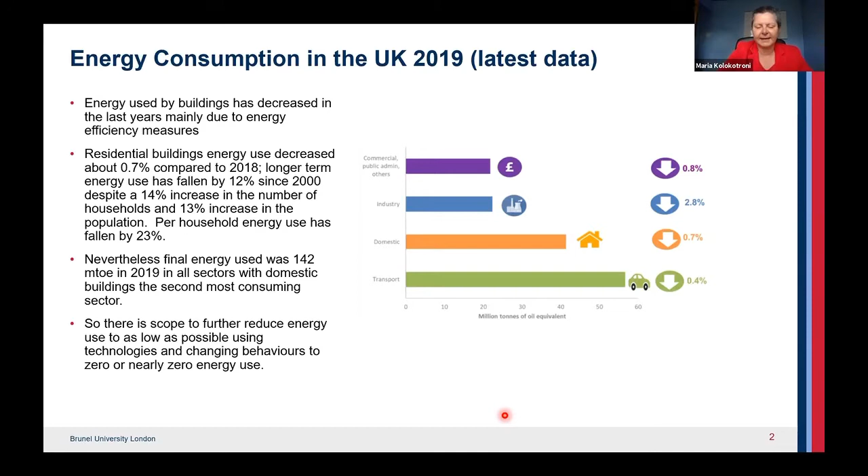Despite this reduction, final energy use was 142 million tons of oil equivalent in 2019 across all sectors, with the domestic sector being the second most consuming, as I mentioned. So there is scope to further reduce energy use as low as possible, using technologies and also changing behaviors of users so that we can achieve zero or nearly zero energy use.

First, I thought of putting some definitions here. What is a net zero energy building? What is nearly zero energy? And what is a zero carbon building as well?

First, energy is used by a building and its systems to provide safe, healthy, and comfortable conditions for its users. Carbon is the amount of carbon dioxide, or equivalent, emitted by the energy uses in the building, and the amount of carbon depends on the fuel used for the production of this delivered energy.

A zero energy building is a building that does not use energy from the grid. A nearly zero energy building uses only a small portion of the energy that other similar buildings use. A zero carbon building is a building that does not emit carbon dioxide equivalent emissions because of the energy it uses. Zero carbon is not equal to zero energy, because carbon depends on the fuel used.

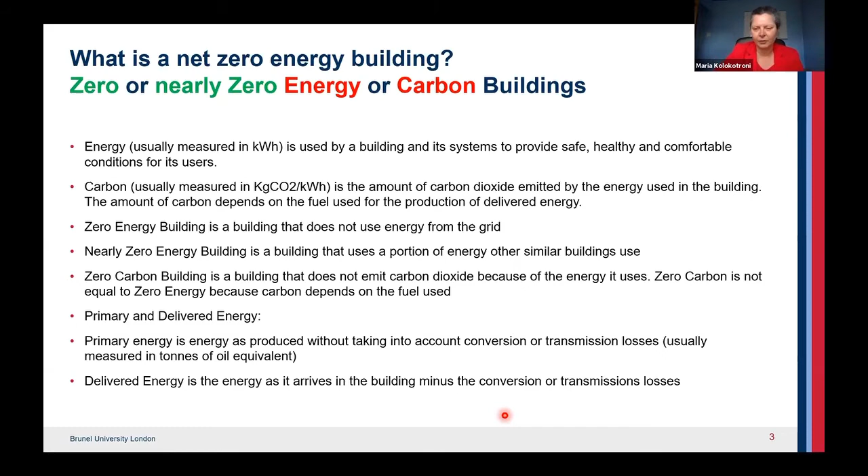Finally, we sometimes use the terms primary and delivered energy. Primary energy is the energy as produced, without taking into account conversion or transmission losses, usually measured in tons of oil equivalent. Delivered energy is the energy as it arrives in the building, minus the conversion or transmission losses, and this is the energy we are usually billed for because we have used it in our building.

So I talked about the definitions of what a low energy building is. But why we provide this energy is in order to have a safe, healthy, and comfortable environment. The four areas we try to provide this comfort in are visual comfort, as we perceive it with our eyes.

Acoustical comfort as we perceive it with our ears, thermal comfort as we perceive it with our skin, and air quality as we perceive it with our nose, but also the effects it will have on health. So there are two aspects here.

All these conditions are provided by the building envelope and how we design it, the installations for heating, cooling, air conditioning, and also lighting and so on. Users are quite important in this aspect because they moderate how the energy is used according to their needs and according to how they want to use it.

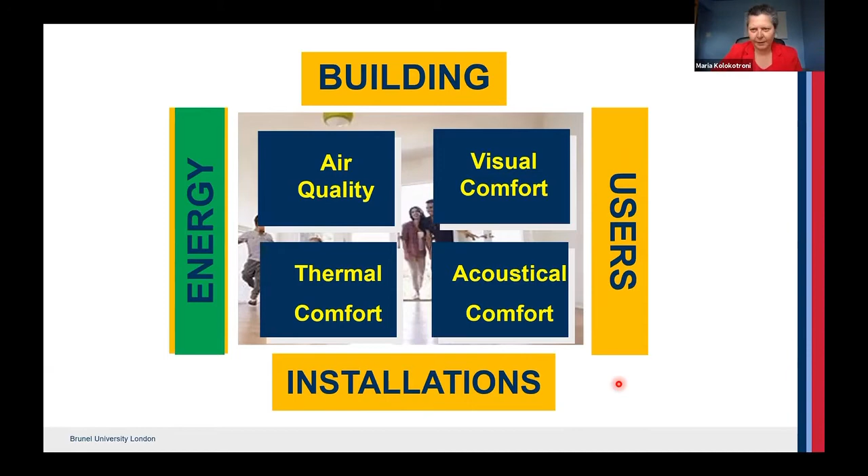First, reduction of energy use that is needed by using passive methods for heating and cooling, such as ventilation, and for lighting, such as day lighting. Then energy efficiency measures, energy efficient appliances and lighting, low energy systems for heating and cooling. And finally, renewable energy integrated into the building to cover the residual energy which is needed.

Of course, these are the principles, but how we reduce the energy and how we provide this energy efficiency is the big question. And we have seen in the press quite a lot of debate lately. I put this headline here from BBC News about banning all gas boilers from 2025 to reach net zero. So there is quite a movement to change the fuels that we use to heat our residential buildings, our houses.

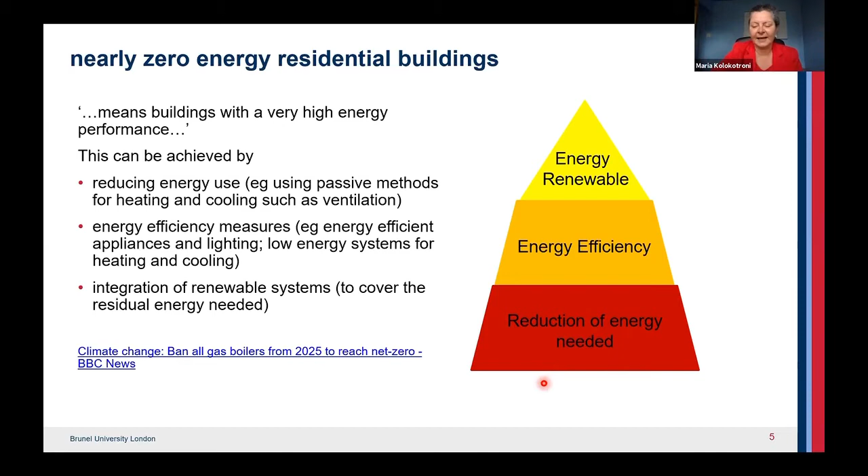The building regulations in the UK encourage net zero buildings, but because they require calculations of the CO2 emissions from the dwelling, that they should be less than a target that is specified. Also, they encourage the fabric energy efficiency of our buildings, so insulation and measures like that are important. And then passive control methods, and also how we operate as users, as occupants, efficiently in our houses.

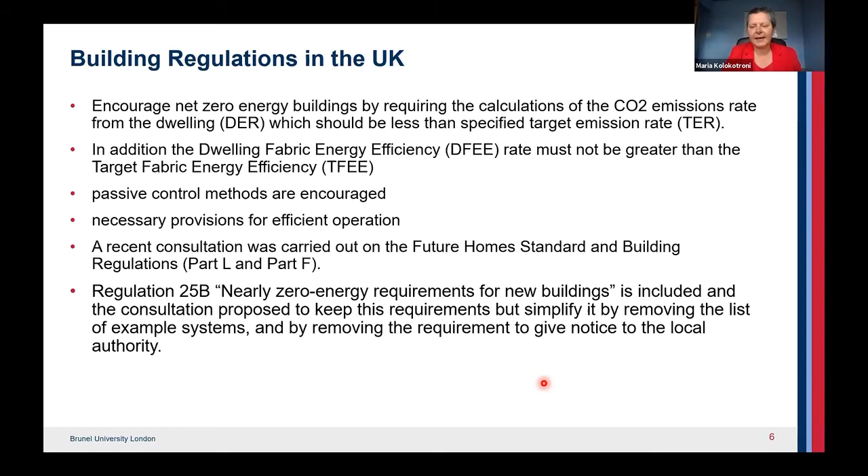There was a recent consultation on the Future Homes Standard and in the building regulations. And there was a regulation 25B about nearly zero requirements for new buildings. And the consultation has proposed to keep this requirement, but simplify it by removing example systems that were there, so it makes it more flexible, and also by removing the requirement to give notice to the local authority, which again adds to the flexibility.

And the next question is, why retrofit to nearly or net zero energy? We all know that the existing building stock is not very energy efficient, and it is also responsible for quite a lot of the total energy use and carbon emissions. And this building stock will be standing for the next 30 years.

So there is an opportunity for energy renovation interventions that will cause positive impacts at all levels. And apart from improving energy efficiency and reducing carbon emissions, we also tackle energy poverty, mobilize the construction sector, and contribute to a cleaner, healthy, and sustainable environment.

However, the energy efficient renovation of residential buildings especially has very low rates at present. So there are initiatives and policies that are proposed there to encourage these interventions. But the tools and technology specifically for existing residential buildings are needed to achieve this, and these are not fully developed yet.

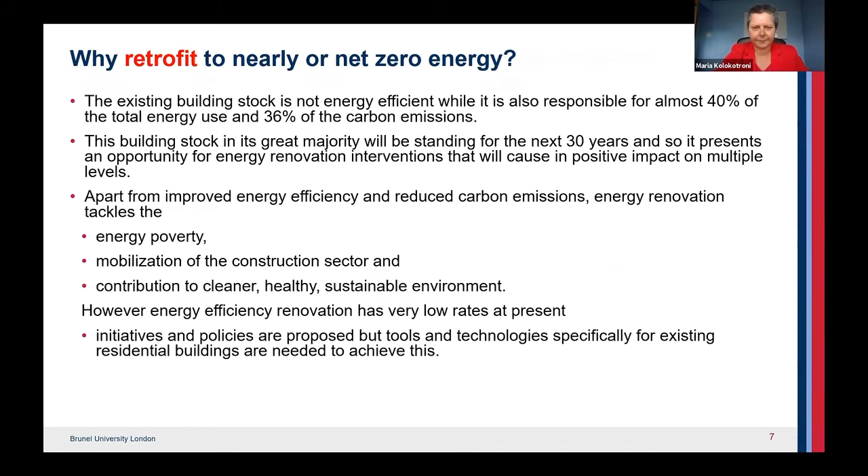So in retrofitting residential buildings, should energy efficiency, decarbonisation, and integration of renewables be the only consideration, which is what I mentioned before? And the simple answer is no, as they need to be considered together with affordability, so costs are very important, life cycle thinking and circularity, and how we use the systems and materials we use, how energy efficient they are in their total life cycle, also high health and environmental standards, and addressing the digital transition as well.

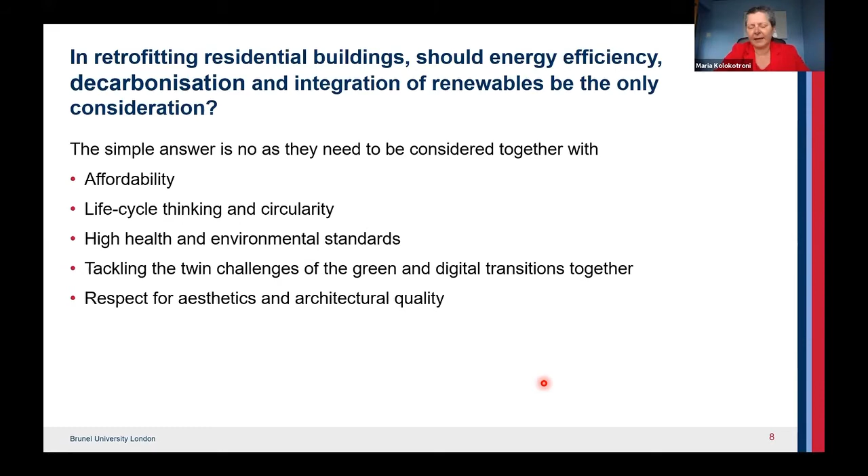How we use this in our buildings. And finally, respect for aesthetics and architectural quality, because if a building is not accepted by its users and society, then it is not going to be duplicated, it's not going to be repeated.

So I will talk about a project that we started about 4 years ago, and it is near to completion now, which is about residential retrofit to create an assessment platform and demonstration for near zero energy and CO2 emissions with optimum cost, health, comfort, and environmental quality.

And in general, for this project, we need to plan it in the right way. We need to carry out the interventions in the right way so that we can get it right in the end. And this project is a European project, and it involves a large number of partners across Europe.

The project has got this three-step approach.

First, the refurbishment assessment through a tool we are developing, which provides a holistic overview including cost, energy, users' requirements, and life cycle assessment of the renovation potential for different user-driven scenarios. Then the planning considers costs and how the intervention will be carried out—do people need to move out, or can they stay in? We look at how buildings can remain operational during refurbishment, selecting an optimal action plan and optimizing the installation process. Then comes the renovation, installing the personalized technologies determined through this tool.

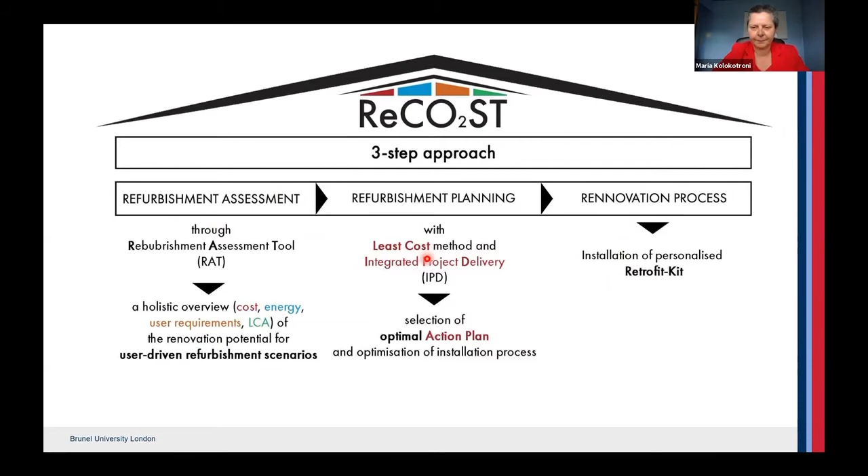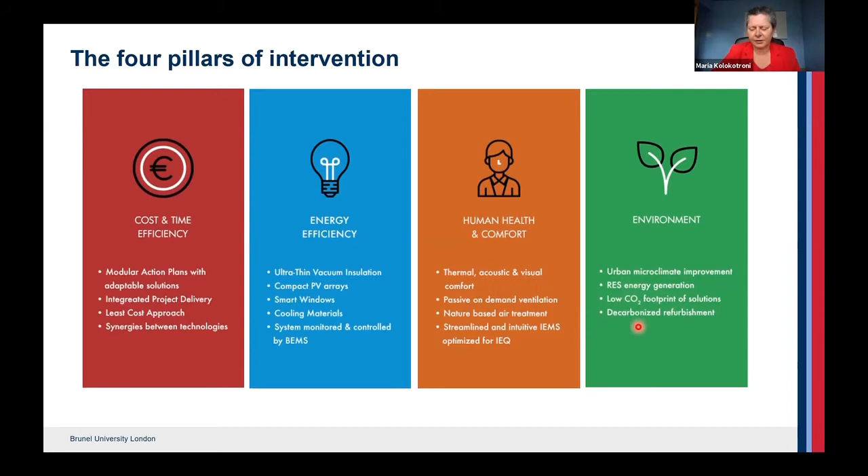The four pillars of the interventions are: energy efficiency with different technologies; cost and time efficiency using integrated project delivery and looking at synergies between technology; human health and comfort, including ventilation and air treatment, which has become quite important especially in the last year or so; and the environment—looking at the urban microclimate around buildings, how this can be improved to reduce energy and increase comfort, renewables, and in general the decarbonization of the whole process.

The ReCO2ST web platform is a fast, user-friendly energy retrofit analysis tool. We rank a large set of alternative scenarios, encouraging the designer and user of the building to take part from the beginning in defining the selection criteria. The objective is to identify the renovation scenario that allows the most balanced outcome of energy saving, CO2 emission reduction, and cost optimization. The selection is based on data on the current condition of the building, and a number of different scenarios are examined, including conventional and innovative retrofitting technologies, allowing us to prioritize which interventions are most attractive according to the selected criteria.

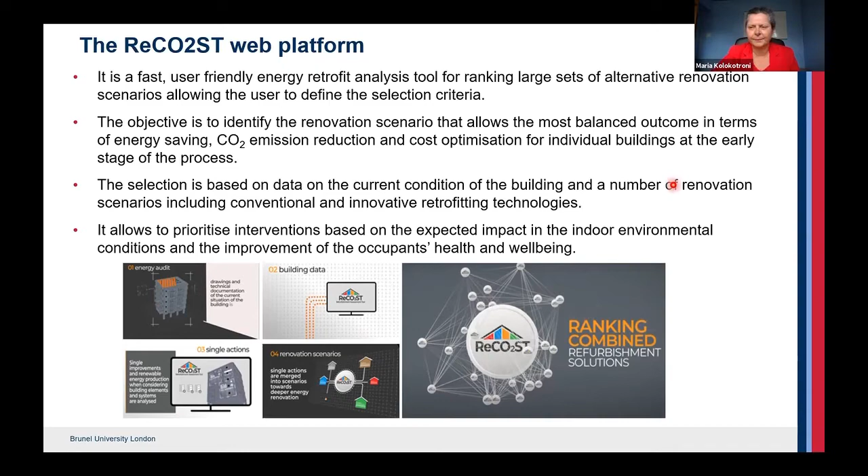So it's a web platform that includes tools that have been developed—pre-existing but developed further by the project. It can also include other tools developed by others. It consists of a structured sequence of actions: first, site visits and energy audits in the buildings to evaluate current status and energy consumption. Then building data is inserted into the platform to quantify the estimated energy and emission saving potential of different technologies, also considering the characteristics of the specific building and the climate. Then various renovation scenarios are investigated.

These scenarios are ranked according to four criteria: impact on energy consumption, which is what we're interested in some cases; cost, which will help faster market penetration; life cycle cost; and improvement of indoor conditions, because there's no point saving energy if people don't have comfort in their houses.

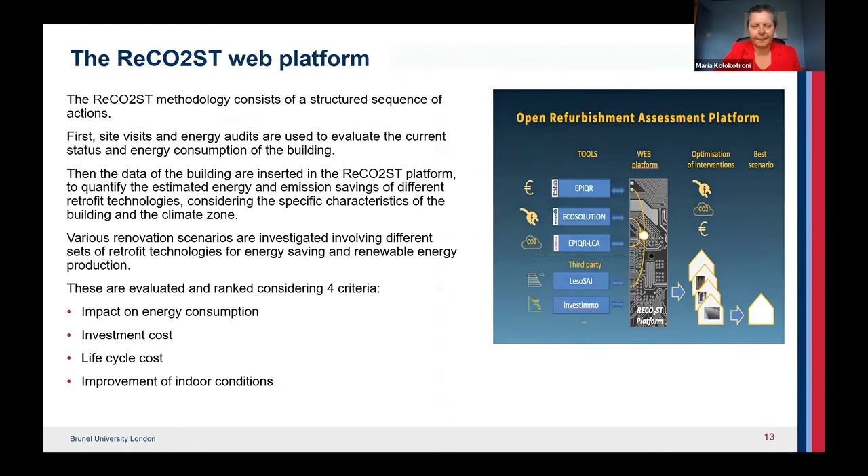Here's an example of one of the tools, EPIQR, which has different elements of the building that are looked at one by one, then subdivided and examined again. All of these are ranked in order according to cost and energy efficiency for the needs of the particular building.

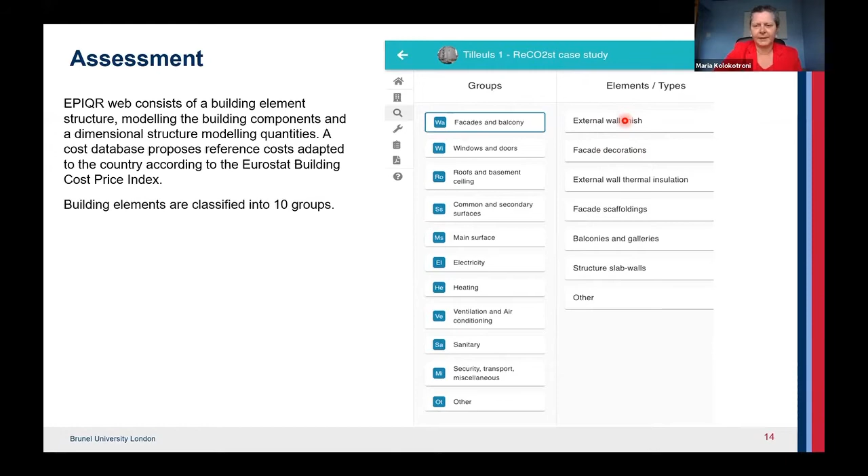Finally, when we evaluate the package solutions we propose for the building, we calculate the energy performance, but also the financial performance of the set of packages. So we've got a financial performance, costs, an energy performance, and then looking at what each one offers, we can choose a scenario that is affordable but will also deliver the most energy reduction.

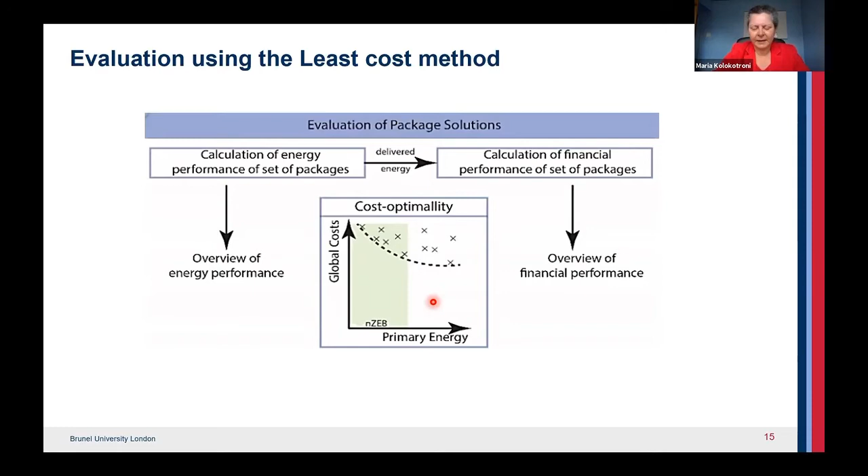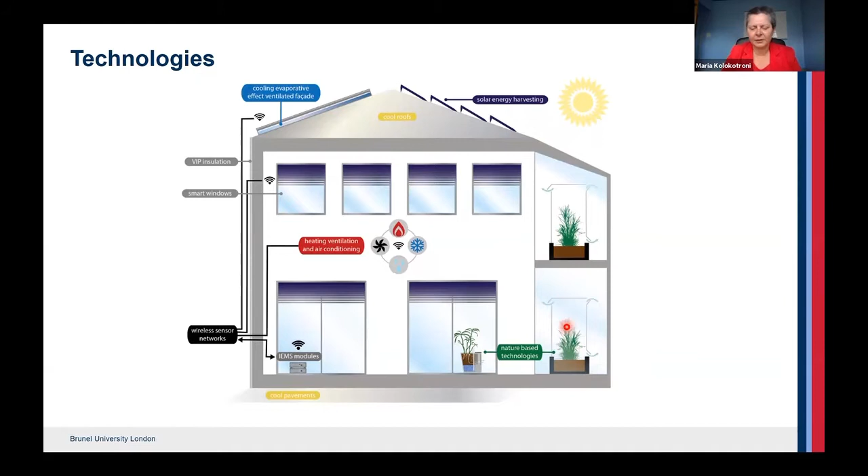To achieve that, we can use conventional technologies, but also need new technologies developed in the last few years. The technologies we looked at in the project include heating, ventilation and air conditioning, and how these will be installed in the building. We looked at the building envelope, insulation and windows, how we can provide passive solutions to avoid overheating, and solar energy harvesting as well. Finally, nature-based solutions that help provide acceptable indoor air quality.

We have demonstration buildings where we installed these technologies, and some buildings were fully renovated in Denmark, in Spain, in Switzerland, and on our campus in the UK—our Brunel campus, one of the residential buildings.

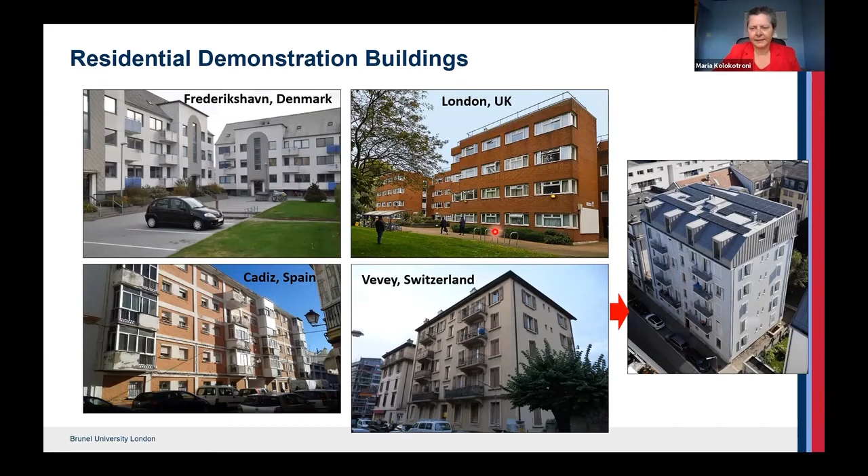In our residential building, our UK demo building, we installed the technologies as they were developed, and then monitored their performance. We have technologies that reduce heat demand, technologies that improve indoor air quality and thermal comfort, and then renewables.

I'll go one by one and show you what it is and how it was installed in our building. First of all, vacuum insulation panels provide an attractive solution because their thermal conductivity is very low compared to more conventional insulation materials, so with much less thickness of insulation we can provide the same protection. This is how a vacuum insulation panel looks like.

Then the question is where to add this insulation, internally or externally. Externally is attractive because we don't have thermal bridges, and we don't take up interior floor space, but it is more expensive to install because it needs protection from the elements. Internally, we have thermal bridges and it will take some of the floor space, and sometimes residential buildings have very small bedrooms and living rooms, so we don't want to lose any of the floor space.

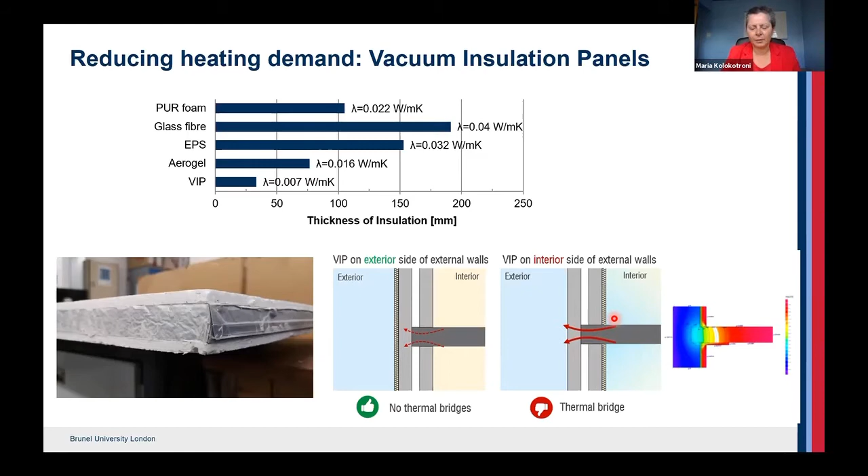So we decided to apply it externally. In order to install the vacuum insulation panels, they need to be protected because there is vacuum inside, so they need not to be pierced. A system was designed on how to do this, and this was part of the exercise. You can see here where it was installed and the final surface here externally as a demonstration.

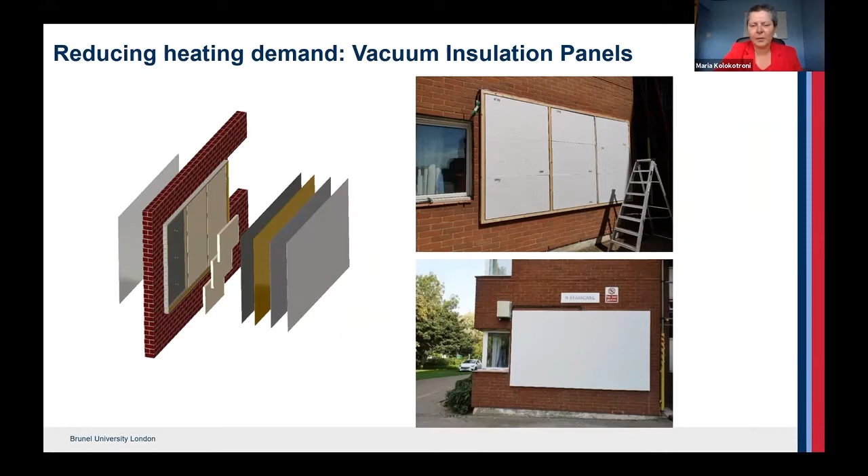This was quite nice because it created interest from our users and the students. Together with the residencies, we carried out an art competition. This is one by the students, and this is one of the winning entries that we wanted to paint on the wall to raise awareness of this issue and renovation of residential buildings.

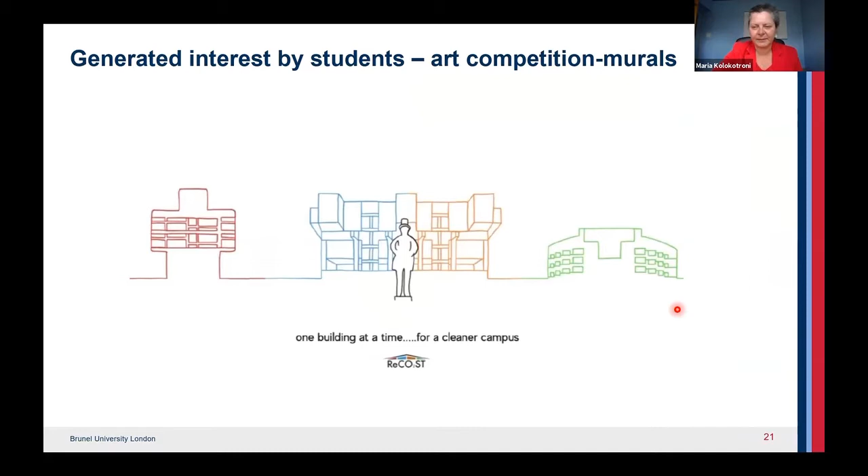But then the first lockdown happened last year, but we hope to do it this summer, so this probably will be materialized.

Now how it performs, we can see here a thermal image of the wall, where we can see that where the panels are, it is much less hot—it's a much colder surface.

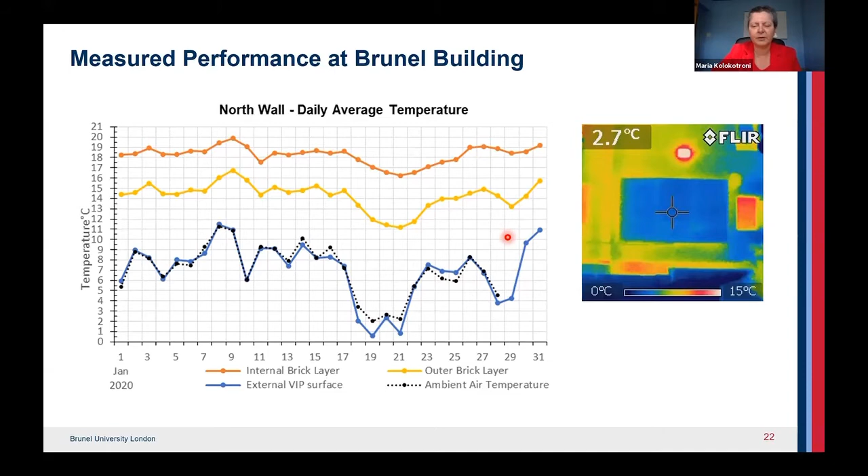In this graph, you can see from sensors we have installed that there is quite protection from the external elements. This is the external, before the external brick surface, and this has stayed quite higher than the ambient temperature, so it provides quite a few degrees of protection, meaning much less thermal heat transfer, so we have much less heat escaping from our building.

The second technology is windows, and we like them—they give us daylighting, allow the view outside, and also ventilation. But sometimes we keep them closed during the winter, and it doesn't bring enough ventilation into our building for indoor air quality, and when we open it, we lose heat.

So this smart, innovative window uses the two panes of glass as a channel to get air from the outside. This air is then heated between the two panels, and then it's let into the internal space.

Apart from the heat recovery it provides in terms of energy efficiency, the air coming from outside also doesn't create drafts, so there's less chance of occupants blocking the trickle ventilation ventilators that we have seen blocked in many houses.

Again, these diagrams show what happens. They also show that in the summer, we don't want the hot air to come inside the building, so it is recirculated and goes outside, while another trickle vent brings air from outside.

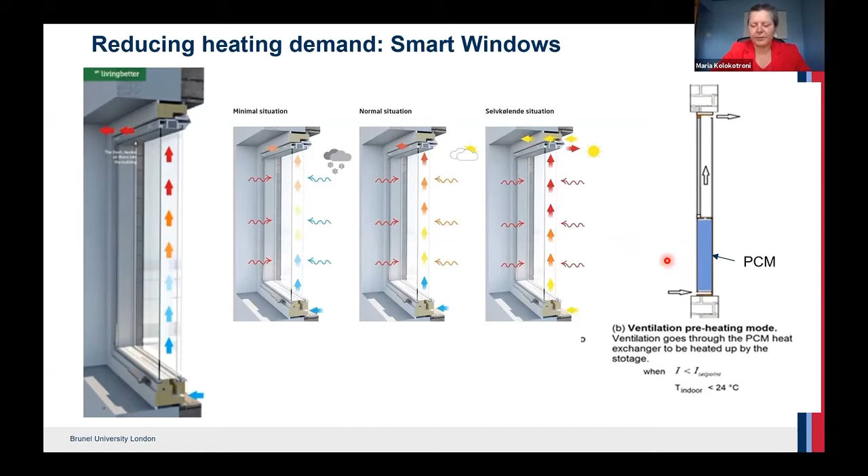This window is also still being developed to include phase change materials in order to increase the efficiency.

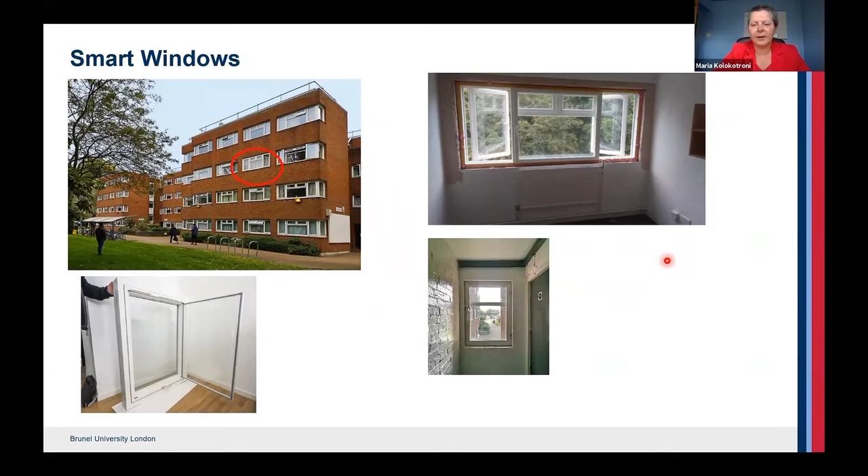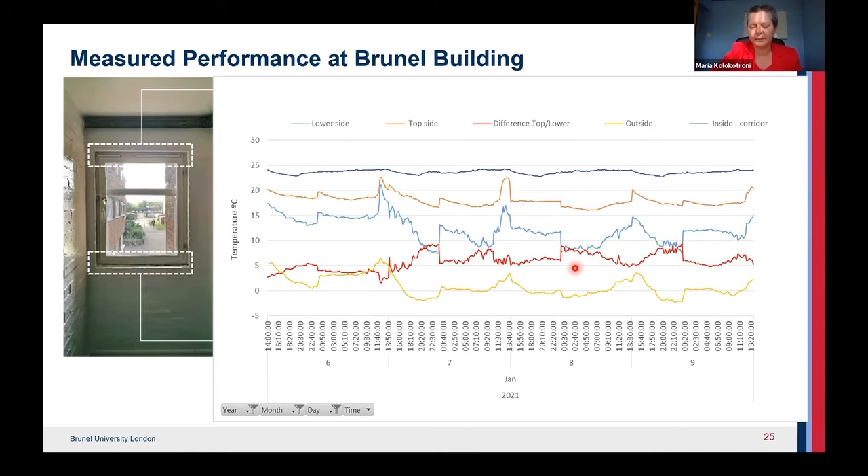I will now move to the technologies to improve indoor air quality and thermal comfort. First, the nature-based solutions—it is plants that help to passively, although it includes a small fan, reduce the pollution inside our buildings.

Particulate matter and volatile organic compounds, but also relative humidity and CO2. This is a standalone unit that can be installed, just put in any space. Here in the kitchen, and here in the kitchen in another building.

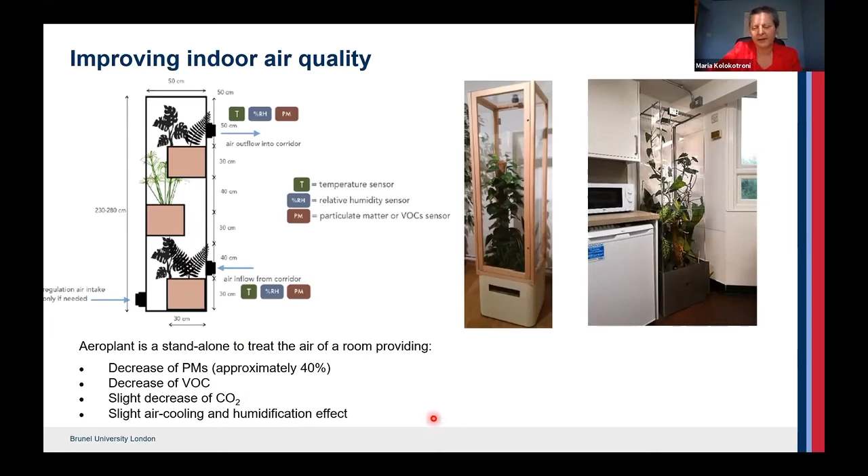As I said, it decreases particulate matter, VOC, and we have seen reduction of CO2 and a slight air cooling and humidification effect as well. Another development during the project is the same unit with plants that could be put in the place of a window, for example, appearing like a small conservatory.

The indoor air is injected at the bottom of the unit with a fan, and then directed upwards, and due to a specific design is guided through a long path between the plant leaves, and then exits the conservatory unit with improved air quality parameters.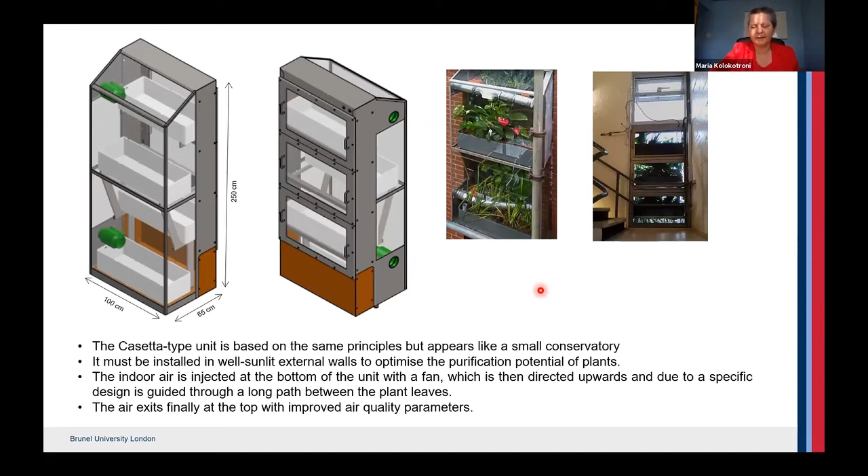Here is the installation in our building at the campus. We carried out tests, and we have seen that the Aeroplant standalone unit has reduced the PM 2.5 about more than 70%, the VOC about 35%, and then the Cassetta unit, again the VOC about 40%, the PMs not so much.

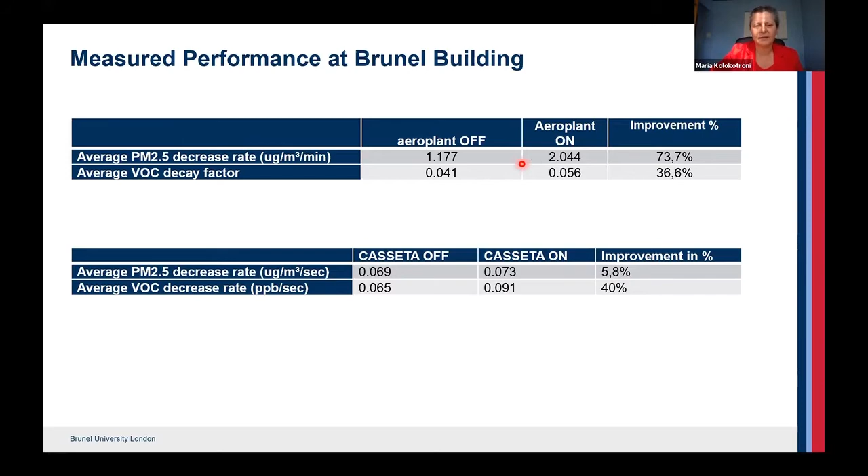We think it is because it needs some improvement. I think the fan recirculation was too high, and also we don't have so many particulates in the corridors like we have in the kitchen where the Aeroplant was installed.

I move now to another way to use phase change materials in ventilation systems to improve thermal comfort. These materials are encapsulated in panels to form thermal batteries within the ventilation path to store and release heat.

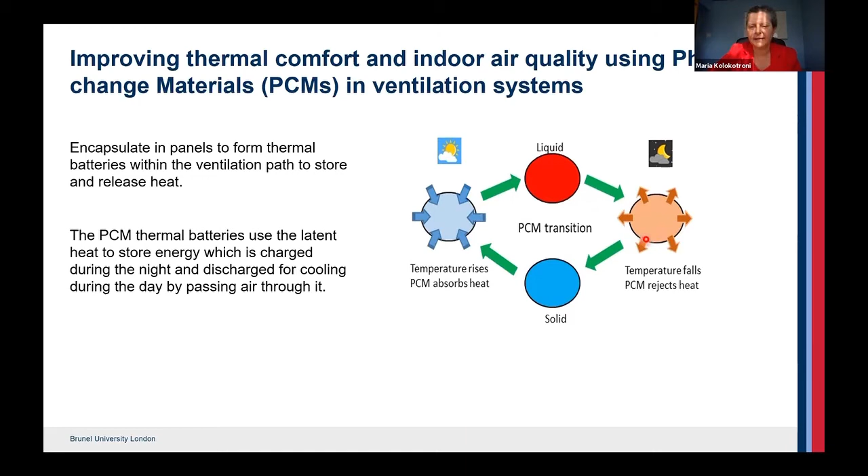They use the latent heat to store energy, which is charged during the night and discharged for cooling during the day. So we have the PCM. As the temperature rises during the day, it becomes liquid, and the coolth coming from there is carried through the air to our building, and then during the night it solidifies again, and the cycle starts again.

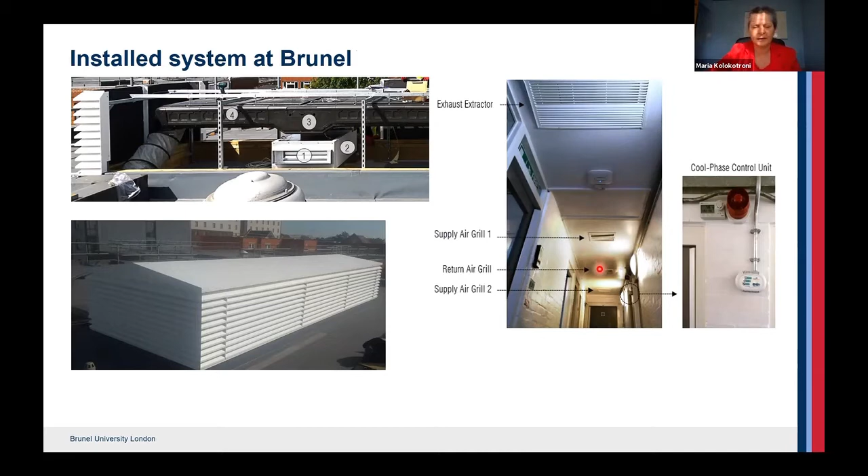Such a unit we have again installed at Brunel, at the top flat of the building, with the PCM materials, the thermal batteries here, and in the corridor we have the air supply and extract. The system is very simple: it is a fan, and then we've got the PCM batteries here.

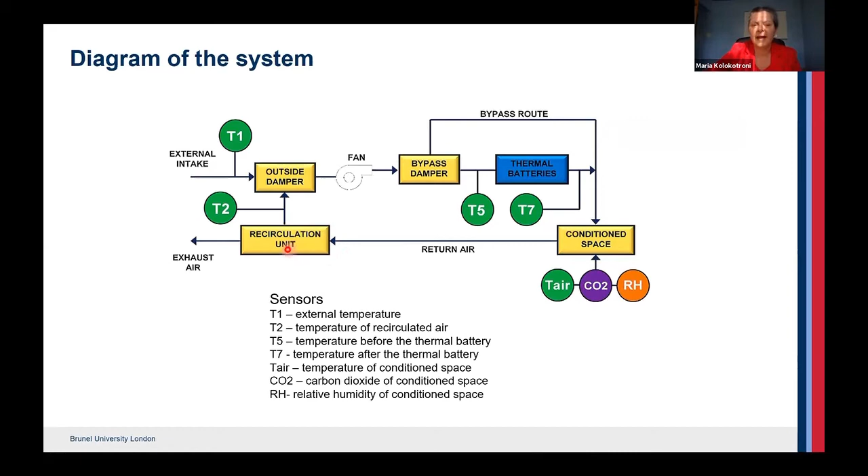We have a bypass damper to bypass the PCM when we don't need to condition the air, but when we need to condition it according to the sensor in the conditioned space, it goes in there to cool the air from outside. Then we have the return air, and again a recirculation unit that, if the CO2 and relative humidity conditions are okay, allows some of the air back into the building.

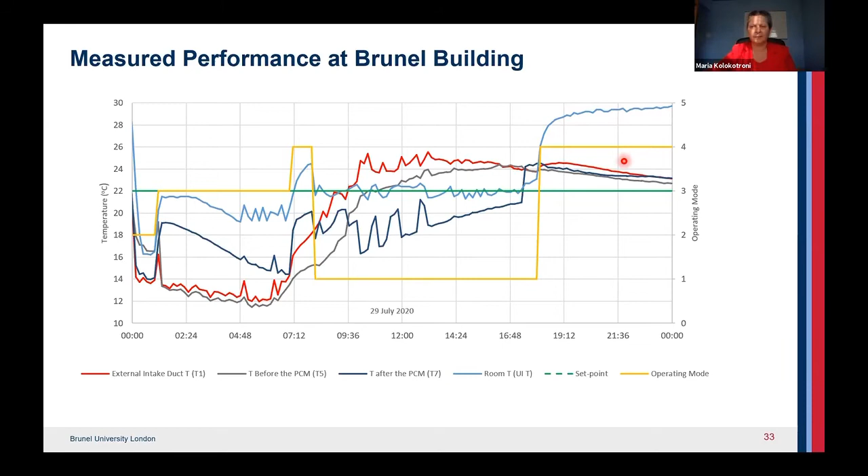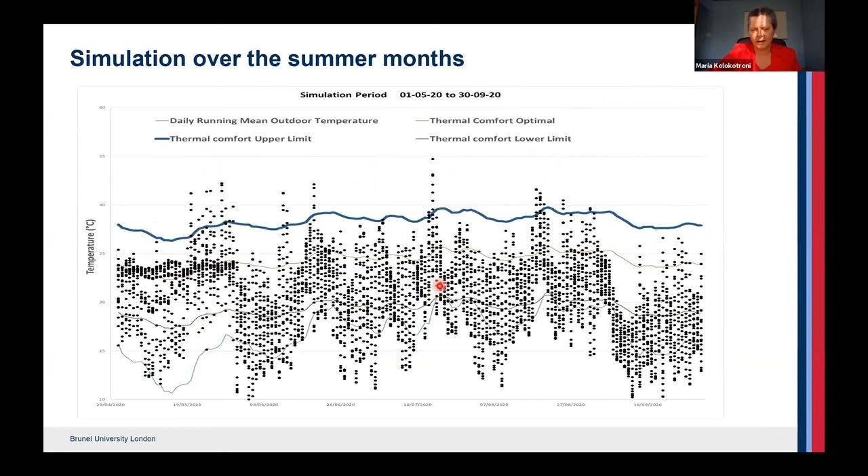But with the system, we can see that most of the hours are within the thermal comfort range, but in some cases there is some overcooling, so the system needs to be fine-tuned a little bit more to avoid this overcooling.

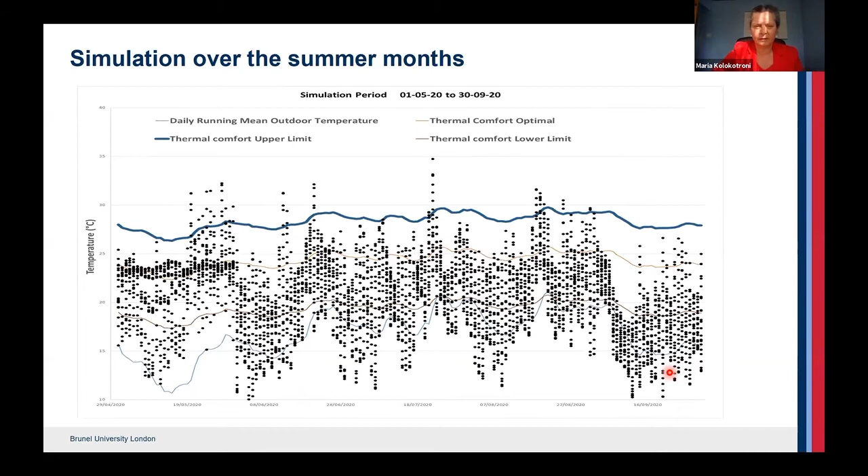Cool roof materials, cool materials, reflective materials, are quite passive methods that help us avoid overheating in our buildings. They are materials with high solar reflectance and high infrared emittance, so less solar radiation is absorbed, and there is a faster release of heat during the night, giving lower surface temperature, which allows less heat to penetrate into the building, less heat transfer, and less heat transferred to the ambient air.

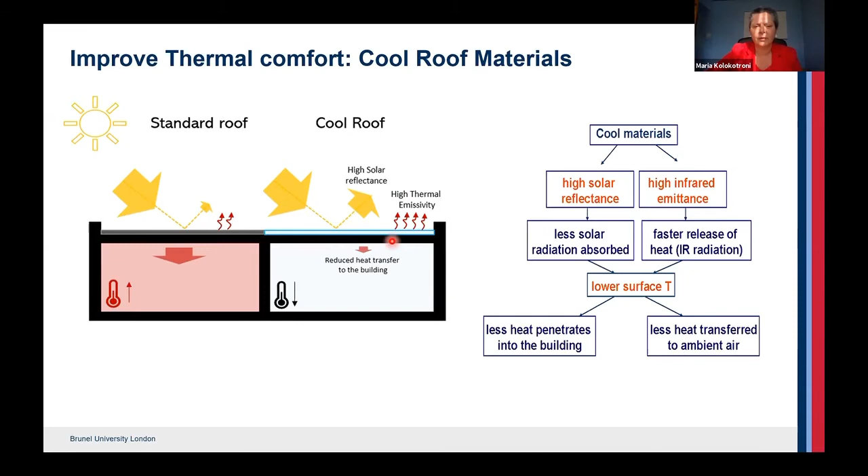Here you can see a diagram of that. Less radiation is reflected over a normal typical roof, while with a cool roof, cool paint, or cool membrane, a higher percentage is reflected, so we have a cooler surface.

We applied this to the roof as an experiment, so we applied it to half the roof and kept the other half for comparison. This was done just after the first lockdown last year, so it wasn't possible to install sensors then, but now they are installed, so we will measure the performance this summer.

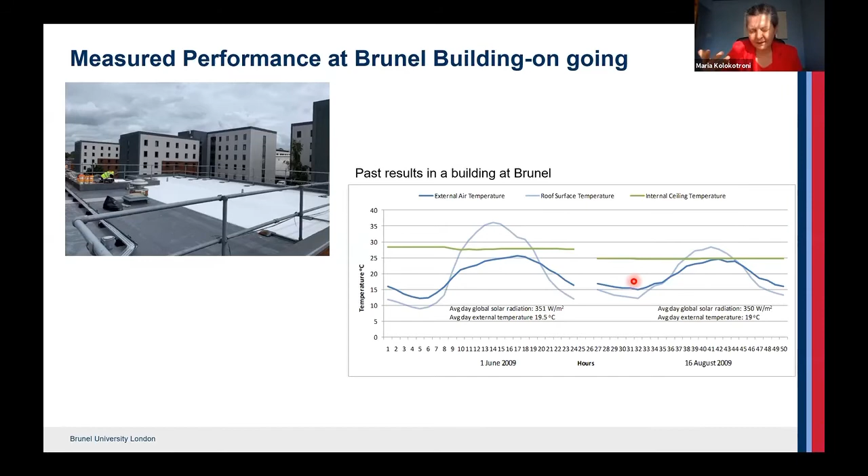Here I'm showing a graph of an intervention we did at Brunel some years ago in another building, where we can see two days with the same solar radiation and ambient air temperature externally. We can see that the surface temperature of the roof is much less after the application of the cool membrane, and the internal ceiling temperature is also much less, which contributes to less overheating and improved thermal comfort for the users.

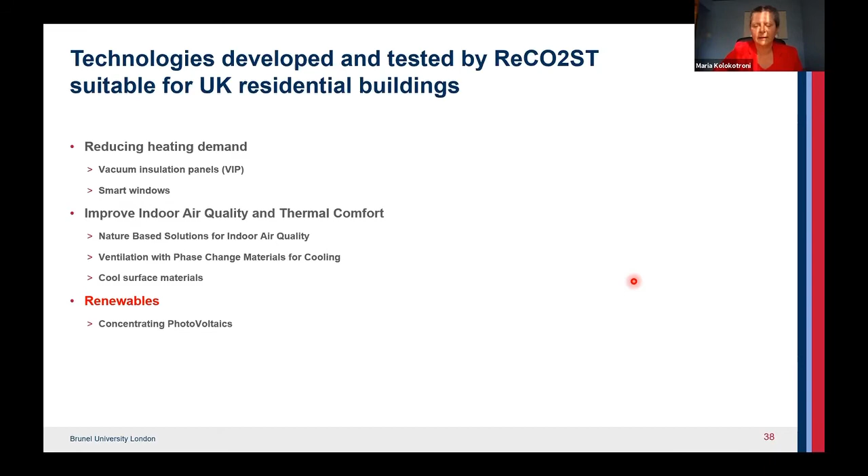Finally, but not least, about renewables. Concentrating photovoltaics is the technology that has been developed in the project. Also, commercially available PV panels were fitted on the roof of the building. The concentrating photovoltaics have been designed, manufactured, and tested at Brunel by Dr. Harjit Singh and his team.

These CPV modules maximize the availability of solar radiation and improve the electrical conversion efficiency of the solar PV cells. The initial target was to produce 10 to 20% higher electricity, with 40% lower footprint and lower cost, and the electricity output has been even more, as we'll see shortly. The increase in electrical energy generated per square meter of available roof space makes this system quite attractive and convenient in buildings, since we don't have so much roof or floor space. The more efficient they are, the more power they generate, and the more of the household's energy needs they can provide.

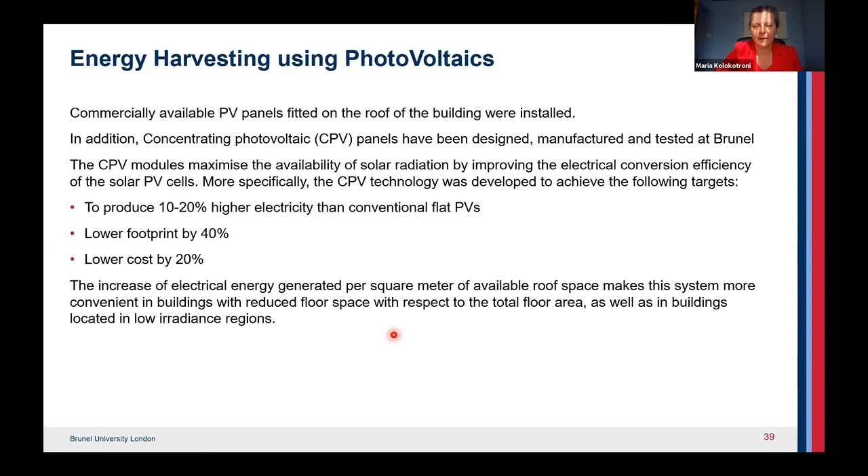These are the different developed designs, taking into account local weather and solar climate. COMSOL ray optics were used to simulate and develop the system. Compound parabolic concentrating optics based designs were developed, and up to 40% more power is predicted based on the cell area.

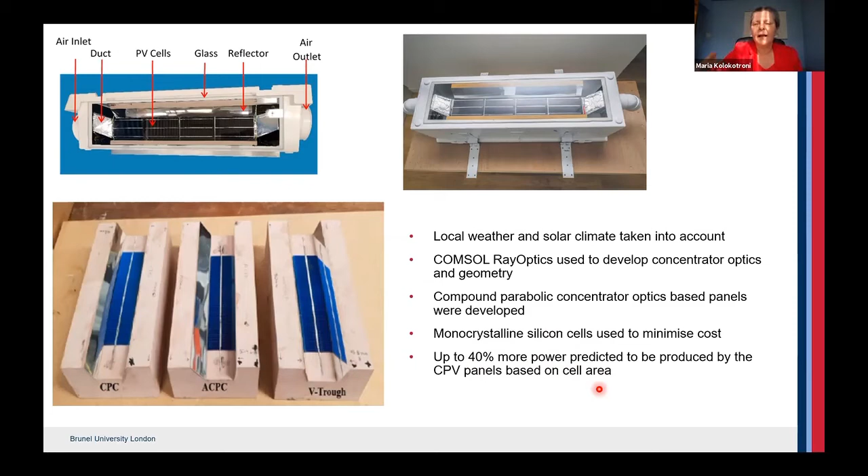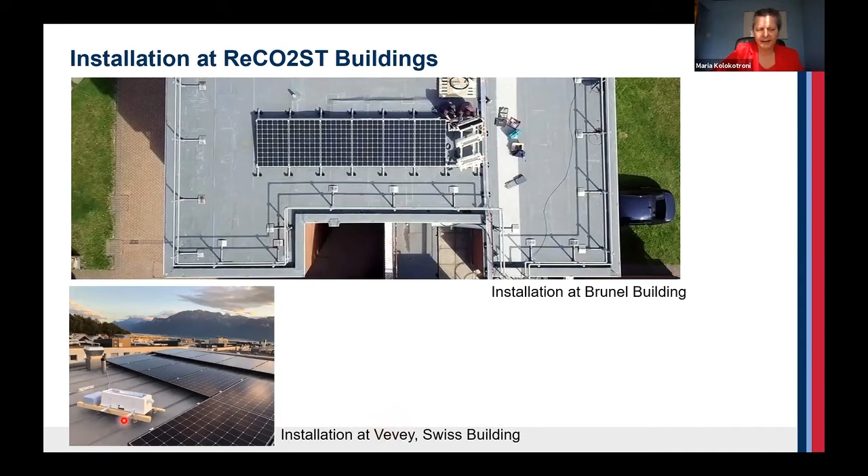And in reality, this happened. Here we can see the installation at Brunel with the three different types installed, and also the installation at a Swiss building at Vevey, to be evaluated under different climatic conditions.

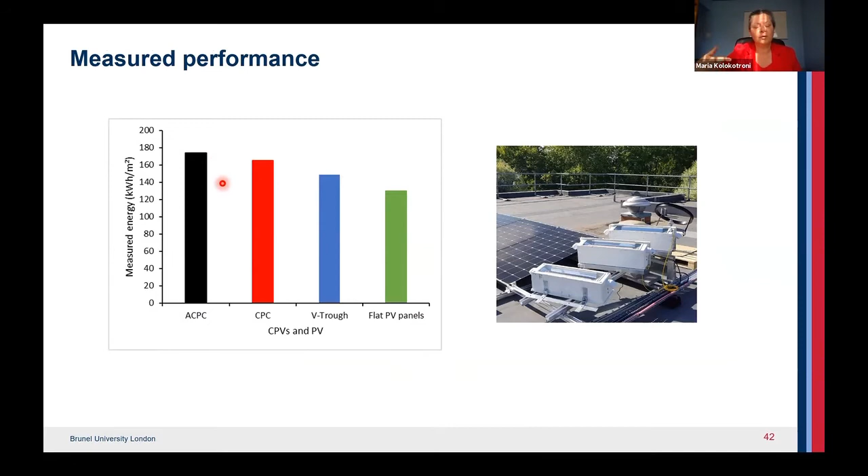And the measured performance is here. Over the summer of last year, actually over 7 months, we can see the measured energy output per square meter of the flat commercial PV panels, and the different designs produce much more, with the ACPC variation design producing almost 40% more output.